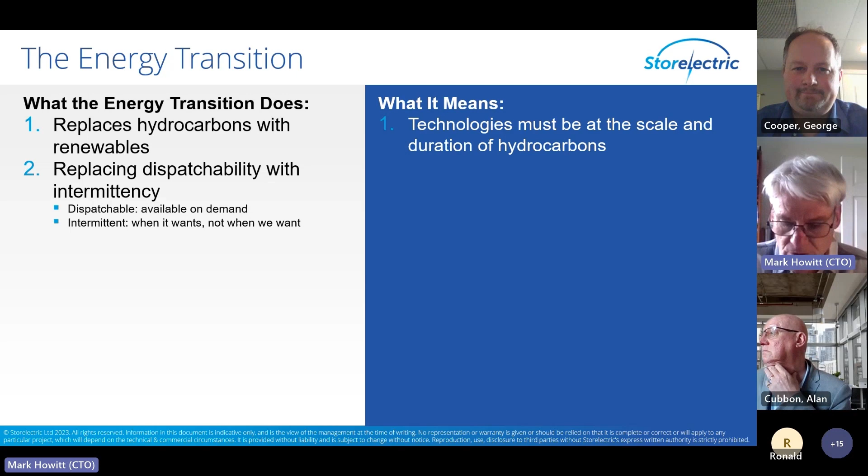But it won't happen at all without solving the urgent problem of grid-scale energy storage, because of course renewable generation is not like traditional generation. Essentially, the energy transition replaces hydrocarbons with renewables, which means that technologies must be at the scale and duration of hydrocarbons. It's replacing dispatchability with intermittency. Dispatchability is availability on demand, and intermittency is it generates when it wants to, basically. So power stations are dispatchable. Solar and wind are intermittent. So is tidal in a different form, and so in a different form is wave energy.

So basically that means that you need to balance the energy to make intermittency dispatchable. So effectively you're changing the energy availability from when it wants to when we want. So that's day and night, that's weather-related longer duration shortfalls. The day and night thing, just think, if we are powered by wind and solar, what happens after sunset on a windless winter evening? By 6 o'clock in the evening, all the batteries in the planet are empty. So what do you do for the rest of the evening and overnight? And then you get weather patterns that extend that for much longer periods.

It's replacing synchronous with asynchronous. Now, that needs explaining because synchronous machines are basically large rotating machines that rotate at a speed that's related to the frequency of the grid.

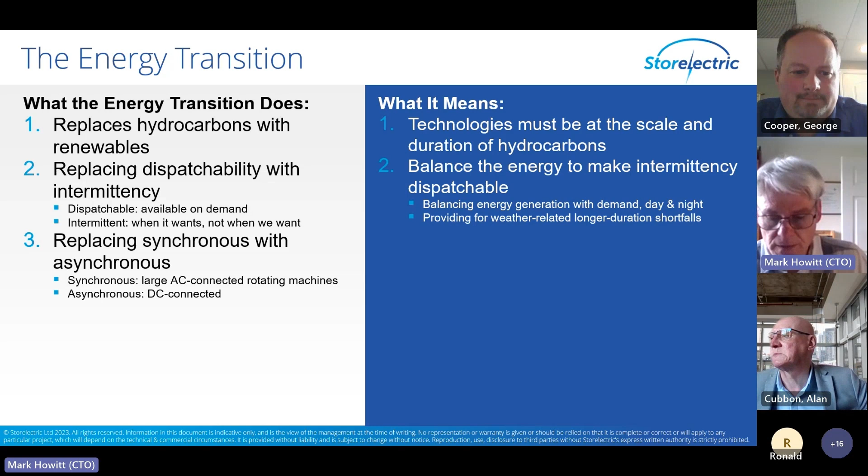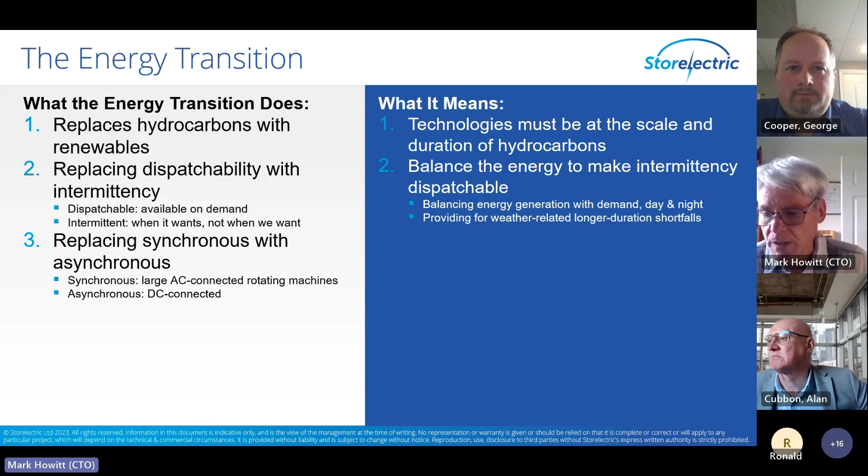There's a mechanical coupling between the speed of the machine and the frequency of the grid, which provides stability for the grid. It provides reliability, resilience, and power quality, none of which are there naturally for a DC connected system. Grid forming inverters can do some of them, but not all of them. So we need to create synchronicity on the grid in the appropriate locations to provide this grid stability, controllability, and power quality.

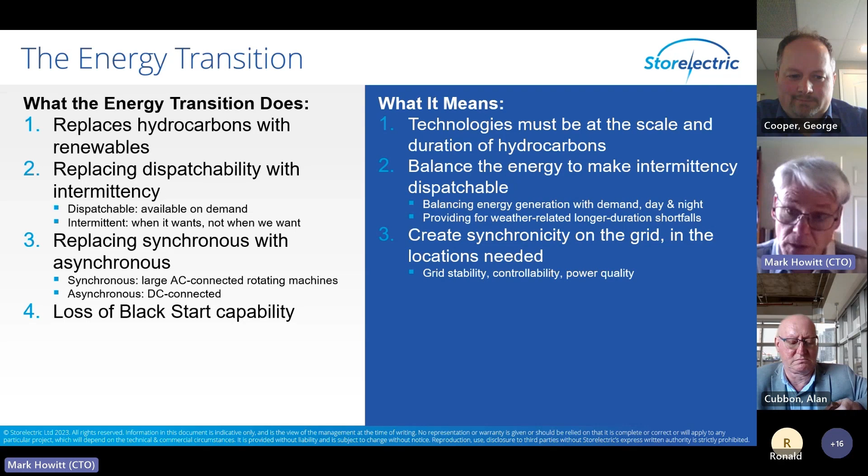Another effect is that you lose black start capability. Now, a number of people think that batteries can provide black start. Well, they can start themselves. And they say if you add on grid forming inverters, they can start themselves on the grid and synchronize with the grid and create the grid frequency. Yes, they can, but they don't have enough oomph to start much else. Basically, black start is starting the grid from scratch.

If you imagine a car pulling another one with a tow rope, when the tow rope goes taut, there's only two things that enable the two cars to move off. One is the torque of the car in front, and the other one is the momentum of the car in front. DC connected systems have neither. AC connected systems, synchronous systems have both.

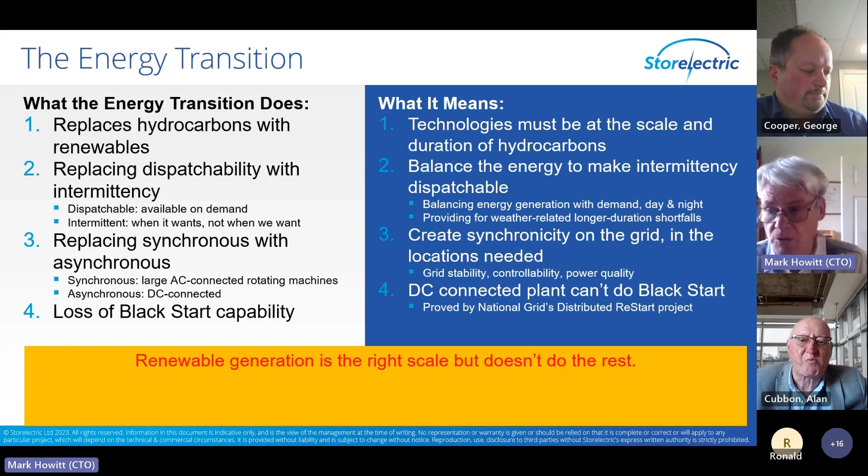And National Grid's Distributed ReStart project proved it. But not if you look at their conclusions. Don't look at their conclusions. Look at the conclusions of the engineering report in the first phase of their development, and that actually comes up with the finding.

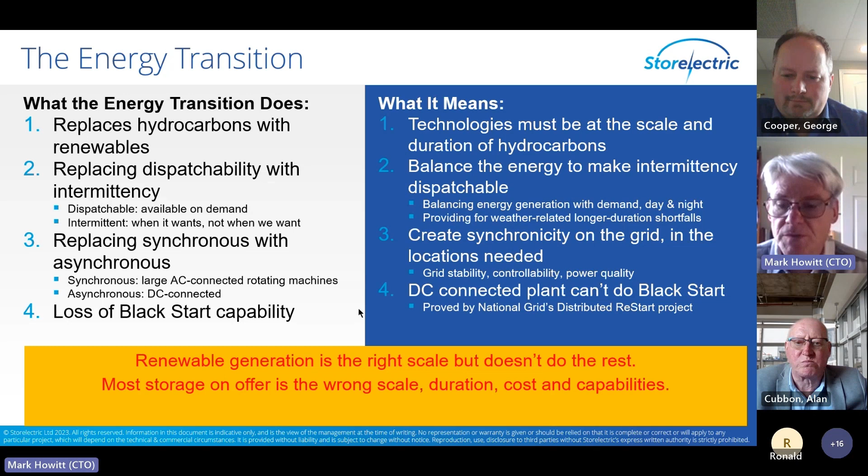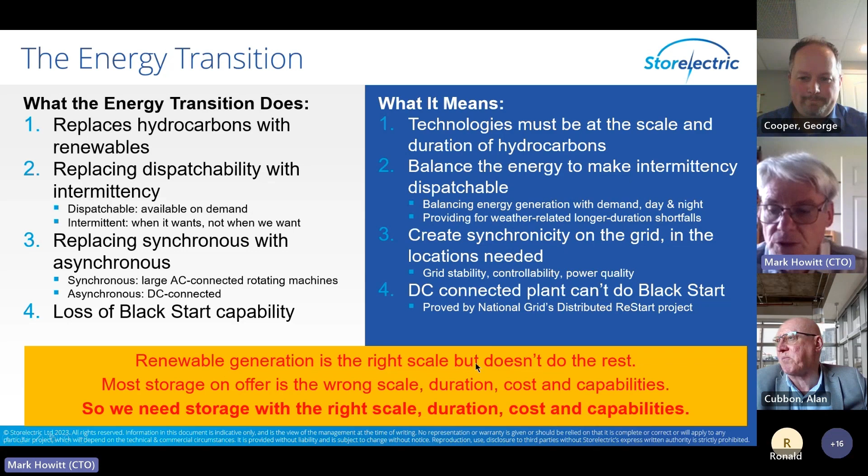So renewable generation is on the right scale, but does not do the rest. Most storage on offer is on the wrong scale, duration, cost, and capabilities. So we need storage with the right scale, duration, cost, and capabilities to achieve the energy transition.

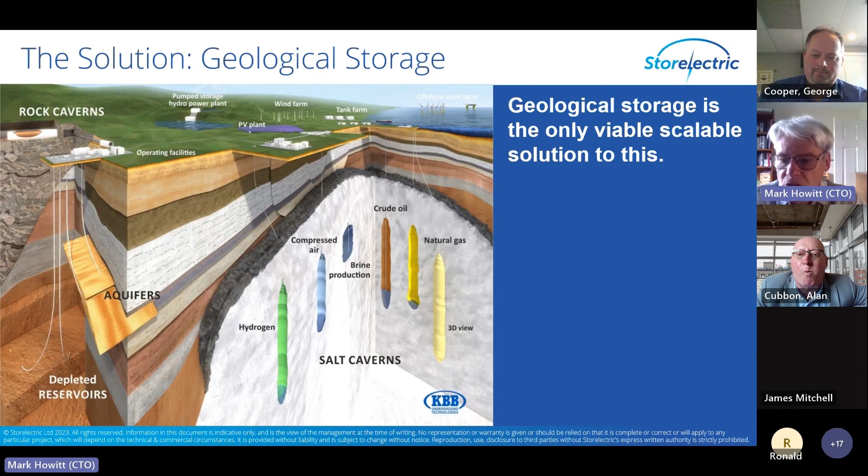The solution is geological storage, not anything above the surface. The only thing above the surface at the right sort of scale is pumped hydro, and there aren't enough valleys for us to want to flood. And those that we do want to flood are far too far away from both generation and supply. So geological storage, storing the energy underground, is the only way that's big enough for this. Storing that amount of energy in metal is just unfeasible and too expensive.

So compressed air energy storage uses green energy to compress air, which you can then let out again to power the electricity grid. Green hydrogen storage, underground storage. Underground salt caverns are the only way currently known that is feasible to store massive amounts of hydrogen for a period of time, cost effectively. So geological storage is needed for both electricity and hydrogen economies.

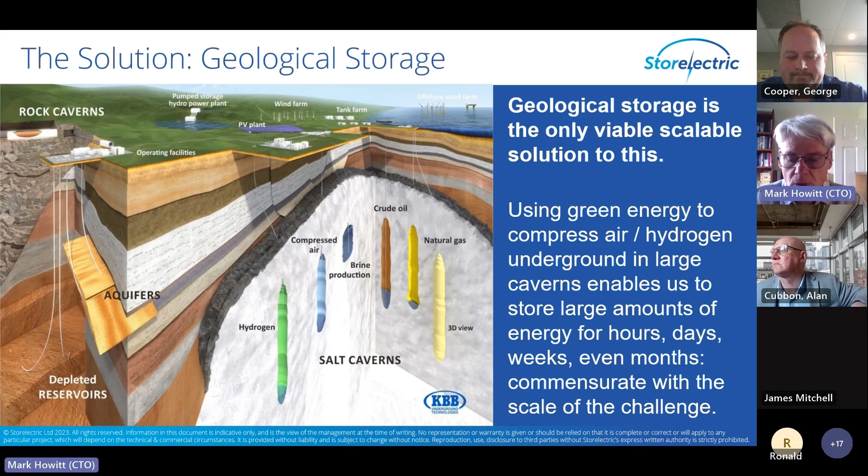And this storage can store hydrogen and electricity for hours, days, even weeks, and hydrogen for months and seasons, even years. So it's the only one with the scale and duration that's appropriate.

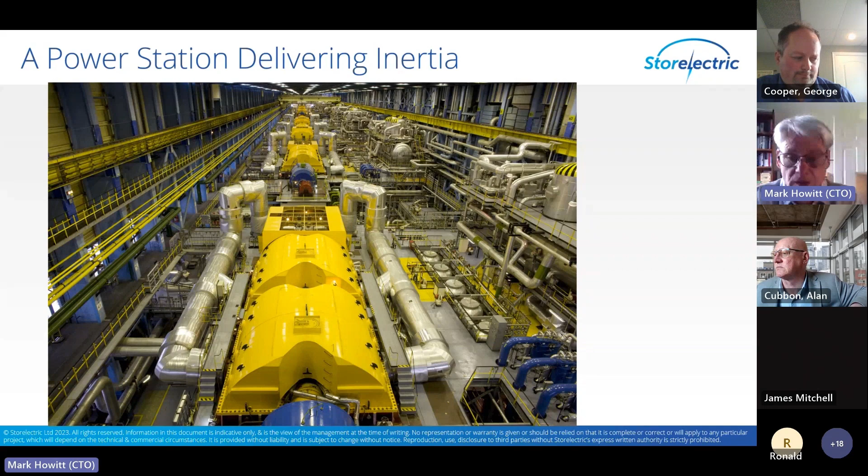Now, why are we talking about synchronicity? Largely because of inertia. Inertia is created by large rotating machines. It's the momentum of a spinning machine. Like in the tow rope, it's the momentum of the car in front. And just to give you an idea of the scale, that's a person. So this is a fairly big power station. It's actually a nuclear power station on mainland Europe. But this shows you just how much inertia is needed on the grid. And this is only one small part of the grid's inertia.

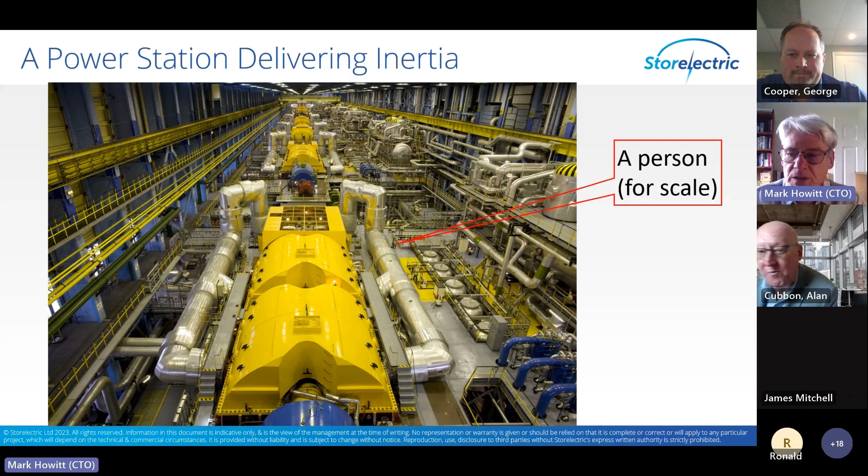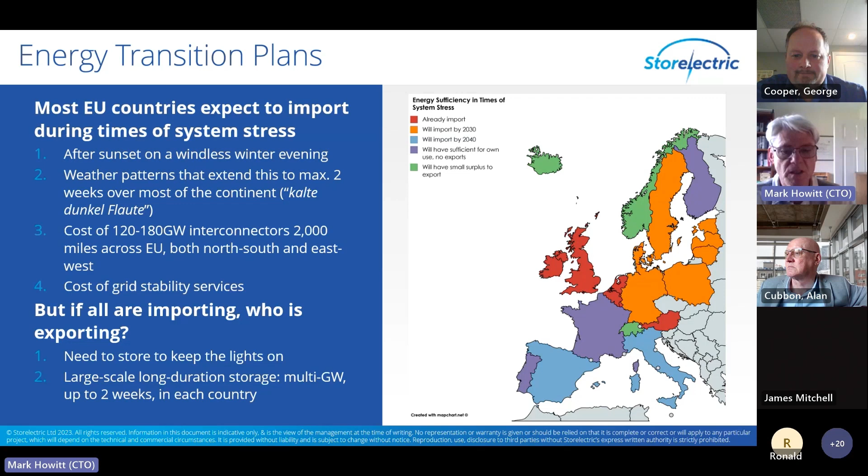Another factor is the scale of the grid. Now, that's a bit of old information. $2 billion of grid reinforcement per gigawatt of new wind connected by 2030. The latest information from before Christmas, I've got to update this. Every new gigawatt of offshore wind requires £3 billion of onshore grid reinforcement, ignoring the grid connection itself.

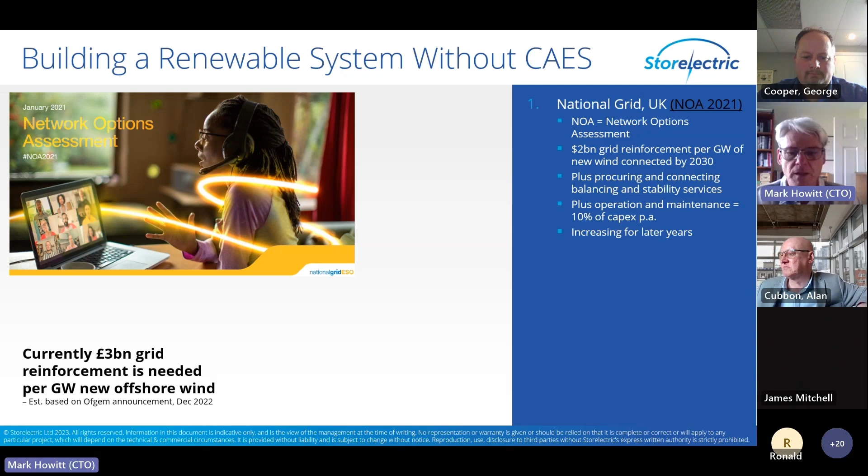And that is completely unaffordable, bearing in mind that we are looking to move to at least, I think it's 118 gigawatts of offshore wind. And that's before you consider the amount of offshore wind that's required for the hydrogen. So that's a completely unaffordable thing. £3 billion per gigawatt of new offshore wind.

Breakthrough Energy did an analysis a couple of years ago in America and said that the grid needs to more than triple in size. I think it was 3.5 times the size, purely to absorb the renewables, purely for electricity use, ignoring hydrogen use. And they concluded that that's too expensive for the USA. So therefore, if it's too expensive for the Americans, what hope do we have?

McKinsey say, and I quote, "The energy transition will require a dramatic increase in capital spending on the electric grid, delivered at an unprecedented pace." And that I don't see happening anywhere much in the world. So we've got to solve that problem. And then there's another one.

There's curtailment, which increases with renewable penetration. And various studies have shown that as renewables account for a greater percentage of electricity on the grid, so curtailment shoots up to unmanageable proportions. And it's largely already there in the UK, to the extent that some years ago they excluded curtailed energy from CFD contracts.

Then there's the non-energy costs of the electricity transition, of running the grid. These are the costs of balancing services, ancillary services, such as stability, power quality, and things like that. Now, a good proxy for that is BSUoS, Balancing Services Use of System. And the costs for those, once we crossed the threshold of about 16% of renewables, started skyrocketing, to the extent that in just 3 years, they increased by a factor of 14 times.

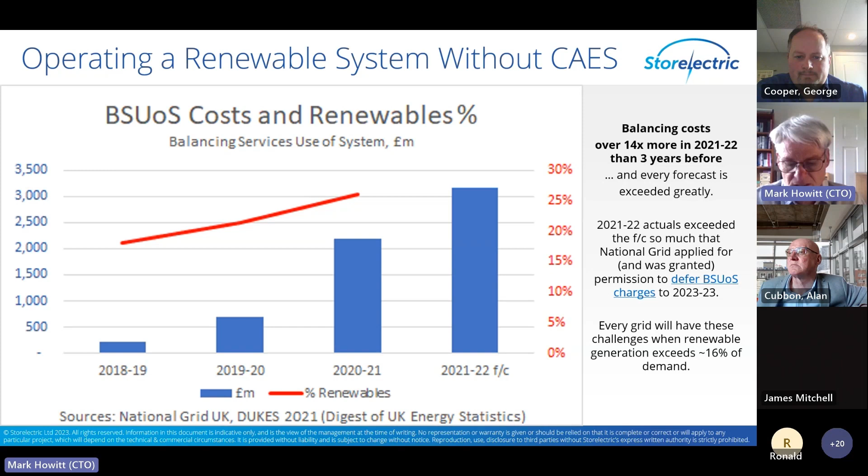Every single grid will have these challenges. I've put it when we exceed 16% of demand, but there is a condition on that. It's only 16% in the UK because we already had 3 gigawatts of pumped hydro. If you've got more pumped hydro, then you can take a higher percentage before it starts escalating. If you've got less long duration storage, then it starts escalating at a much lower percentage of renewable penetration.

So what is the effect on bills? Electricity bills used to be somewhere between 75 and 80% wholesale energy costs and 20 to 25% system running costs. Now it's inverted. 38% wholesale energy and 62% system running costs. But that's just the superficial thing.

You look down at what wholesale energy is. That also includes system charges. And the system running costs are rising exponentially. So essentially, we are down to the level where those top percentages are inverted. The cost of electricity is less than a fifth of the price of electricity.

We think that the Putin premium is to blame for escalating electricity costs. I put it forward that the Putin premium is merely a mild effect compared with the energy transition because of the lack of storage on the system.

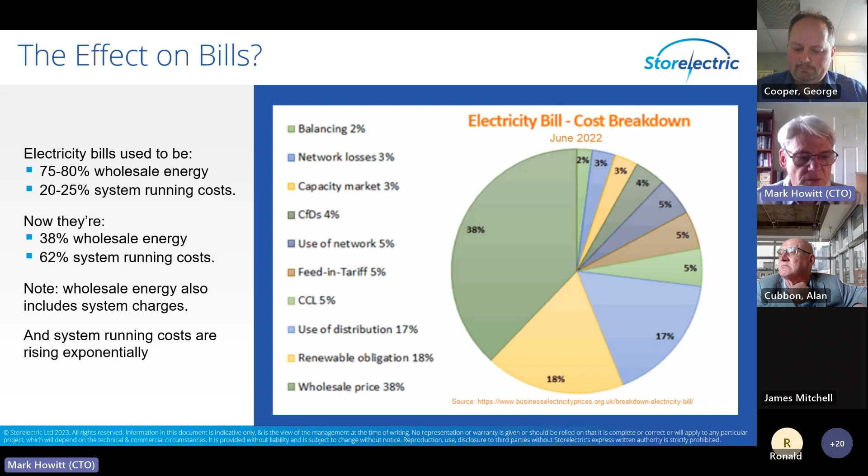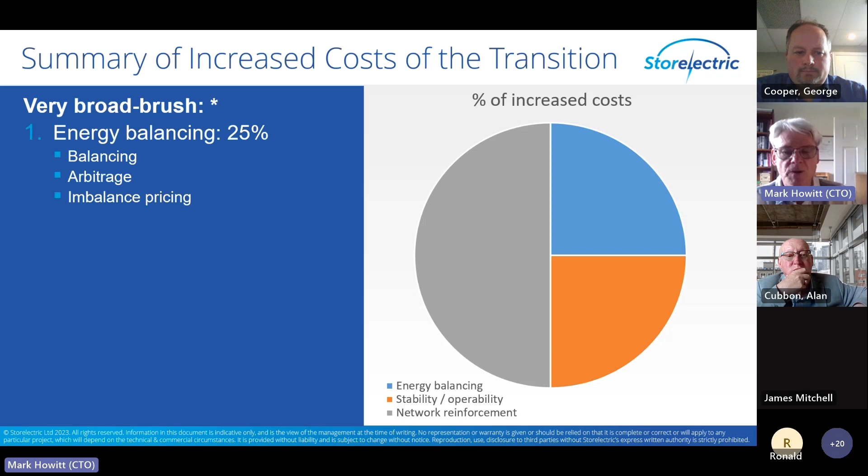So a summary of the increased costs of the transition, very broad brush, are roughly 25% for balancing energy, 25% for system operability, and 50% for network reinforcement. Down to more grid, down to congestion and to curtailment. And these numbers will vary by jurisdiction.

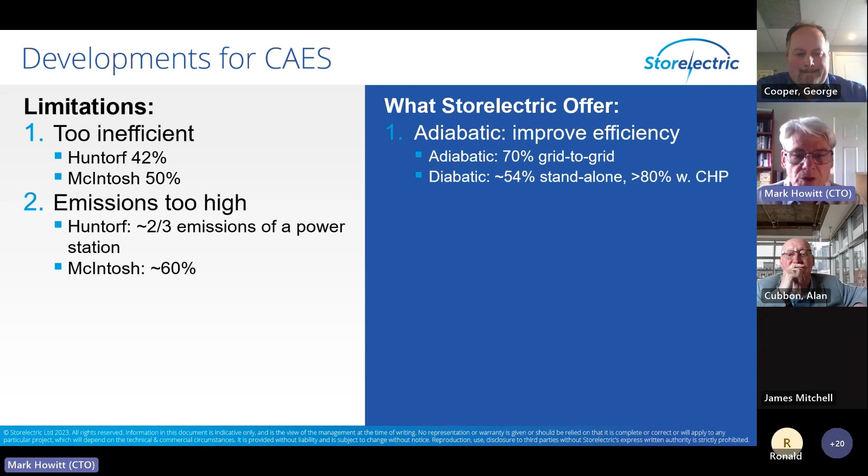So the limitations of, we focused on compressed air energy storage because we saw that the need was geological storage and nothing else is at the right scale and duration. We focused on it as being too inefficient, so we created an adiabatic version and a diabatic version, both of which are significantly more efficient than the traditional stuff. Emissions were too high, great big fractions of the emissions of a power station, which we eliminated with the adiabatic, and the diabatic one made dual fuel so that it will decarbonize as the grid decarbonizes.

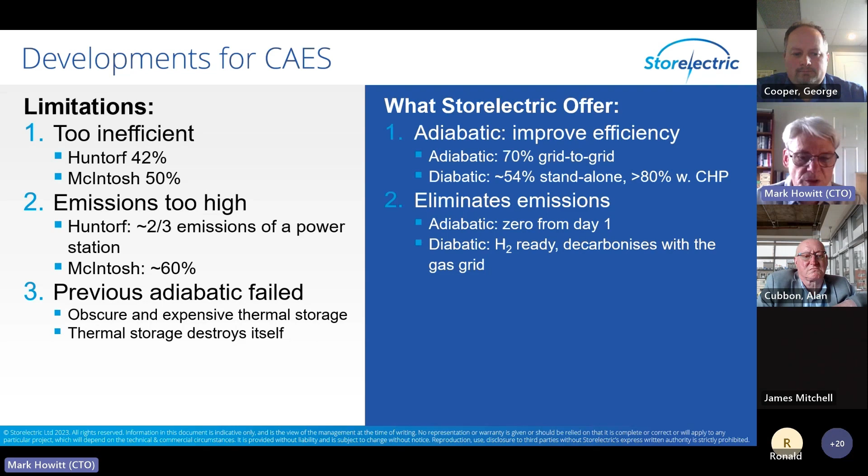The previous adiabatic case failed. We're using obscure and expensive thermal storage and stuff that destroys itself. So we perfected that in all of those factors and perfected the integration of that with the power and air subsystem. Unfortunately, I can't go into that in a public presentation.

Limitations of scale due to using salt caverns for air storage. Those are more perceived limitations than actual, but we will develop other geologies. But those other geologies will always complement salt cavern storage. The reason I say that is because salt caverns are a nice cavity. If you use, for example, depleted hydrocarbon wells or aquifers for storage, that's more like a sponge compared with the cup of salt caverns. Holding water in a cup is good for quick in, quick out, short duration. A sponge is far better for slow in, slow out, long duration. They complement each other.

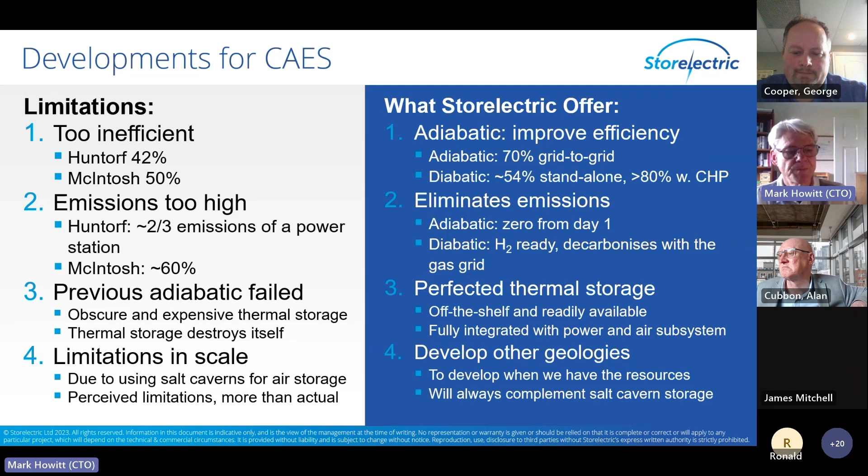So that's 15% penalty. The effect of lifetime average is that over the 8 to 10 year life of the batteries and the electronics, both of those numbers will double. So to get your lifetime average, you need to double that 15% penalty. And you've also got to manage a rapidly deteriorating asset. Cost effectiveness at scale and duration is a lot better because of the scale, duration, and plant life that it offers. The plant life being 5 times that of batteries with midlife refurbishment.

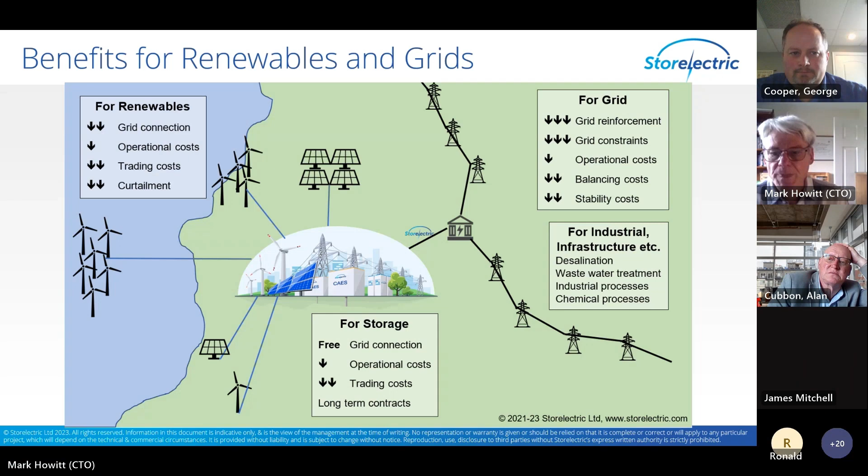Not only that, but the onshore grid is sized for peak demand. What you're putting out is peak demand. So therefore, the effects on the onshore grid, the benefits, are radically greater than that. Then we looked at hydrogen.

Limited storage capacity. A lorry carries 3 tons. Whereas salt caverns, identical salt caverns, this is why we looked at it, albeit with different metalwork, better metalwork, can store 10 million tons, which is a radical difference in the amount of storage. Yes, you can have gasometers, but they're only going to be in tens, maybe as much as hundreds of tons of hydrogen. We're talking about tens of millions here.

Different order of magnitude. Electrolysis hates intermittent power. Lots of people talk a great deal about truly green electrolysis being coupling the electrolyzers directly to the renewable generation. But that reduces the electrolyzer efficiency, it reduces electrolyzer life, and you need 3 to 6 times as many electrolyzers per ton of output hydrogen, as compared with powering the thing from baseload electricity.

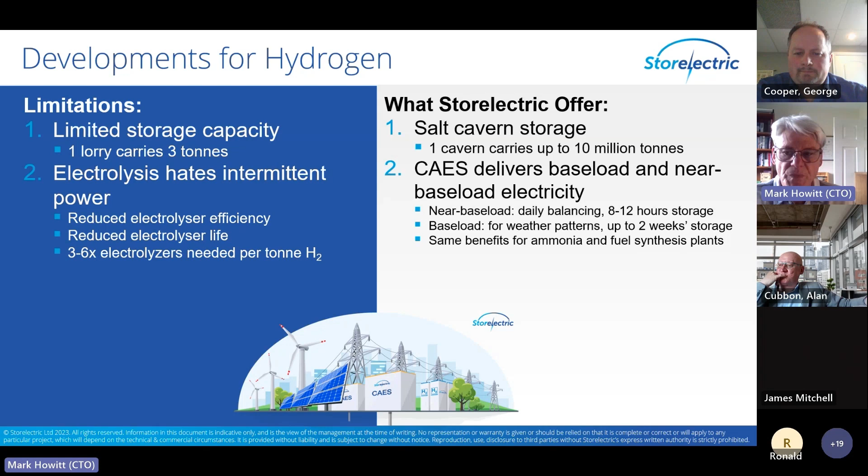So, for example, if we're powering our electrolyzers using offshore wind from the southern North Sea at a load factor of 40%, you need 2.5 times as many electrolyzers for the same output, ignoring the efficiency reduction. Whereas we can deliver near baseload or baseload electricity to the electrolyzer, and we can do so thoroughly green. And we can do so without the grid connections as well.

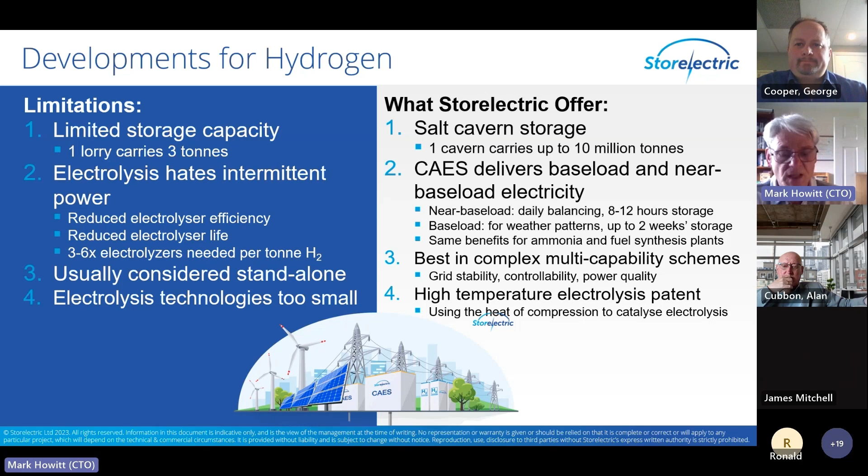Hydrogen is usually considered standalone, but we've found that it's best in complex multi-capability schemes. Electrolysis technologies are too small. So we've also developed a high temperature electrolysis patent, which we will develop sometime soon, which uses the heat of compression to catalyze electrolysis at large scale. So the hydrogen economy, not just electrolysis, hates intermittency, which reduces hydrogen plant life and requires much more asset investment, as I've just said.

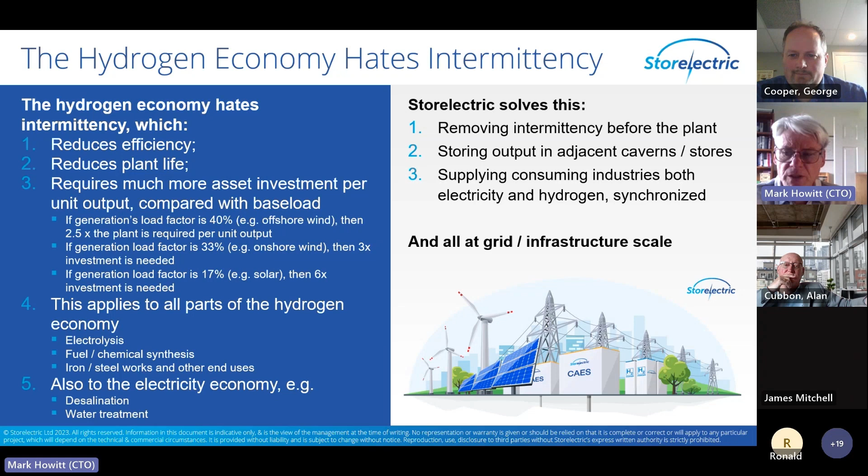So it applies to the whole hydrogen economy: electrolysis, the fuel and chemical synthesis, the ironworks, the steel works, and also to the electricity economy, such as desalination and water treatment. All of those, they don't want intermittency. They want something close to baseload power. So we can solve this by removing the intermittency before the plant, storing the output in adjacent caverns or stores, supplying the consuming entities with both electricity and hydrogen, and those would vary in a synchronized way, if they vary at all. And we can do all of that at grid and infrastructure scale.

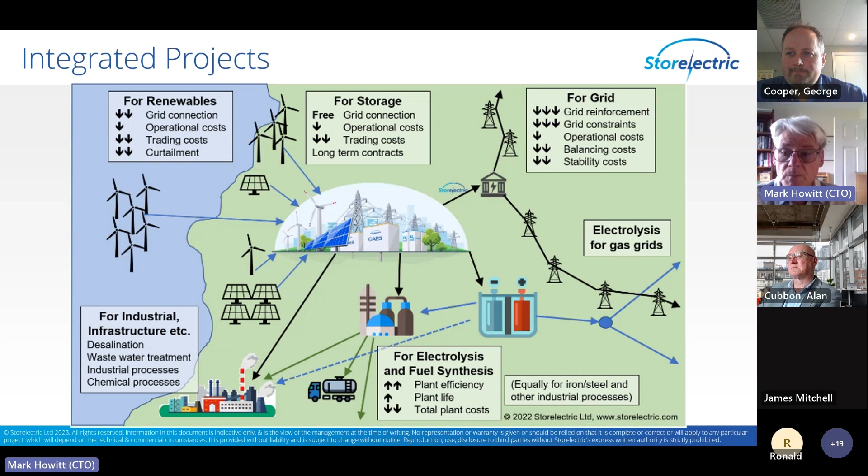And that will transformatively improve the costs of the hydrogen economy, while at the same time avoiding the need to excessively reinforce the grid at such enormous expense. And that enormous expense is growing greatly. In about a space of a year, that cost of grid reinforcement increased by almost double. So that is how large-scale, long-duration electricity storage and hydrogen storage can enable the energy transition and renewables to power the grid affordably, reliably, and resiliently.